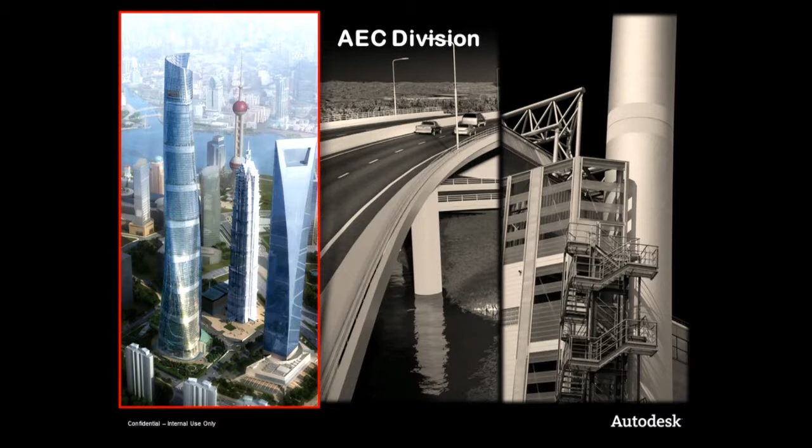It doesn't mean Revit is not used in other industries. Actually, a lot of people use Revit for plant and infrastructure projects, but I'm going to spend most of the time on the building side.

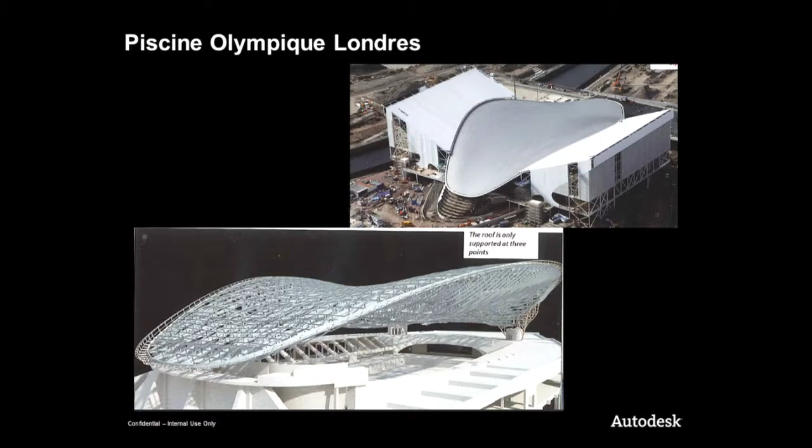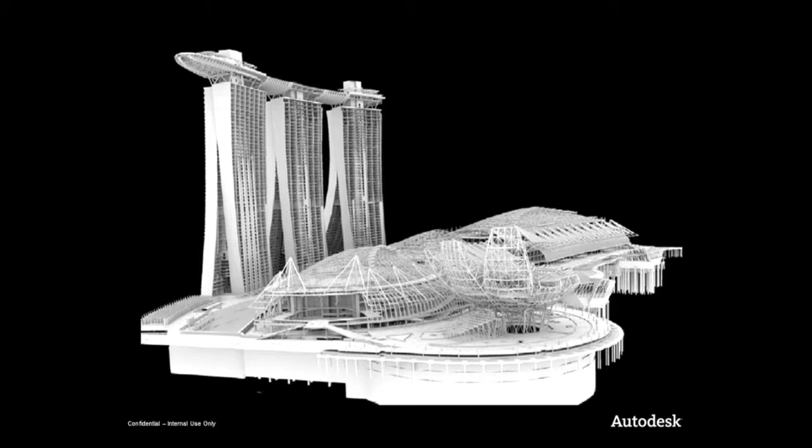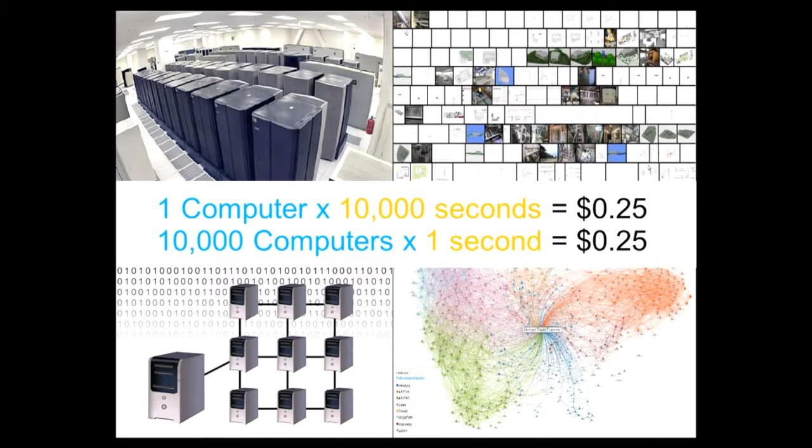So first of all, cloud computing, I'm sure you know what it means. And Autodesk is strategically moving into cloud computing through our partnership with Amazon.

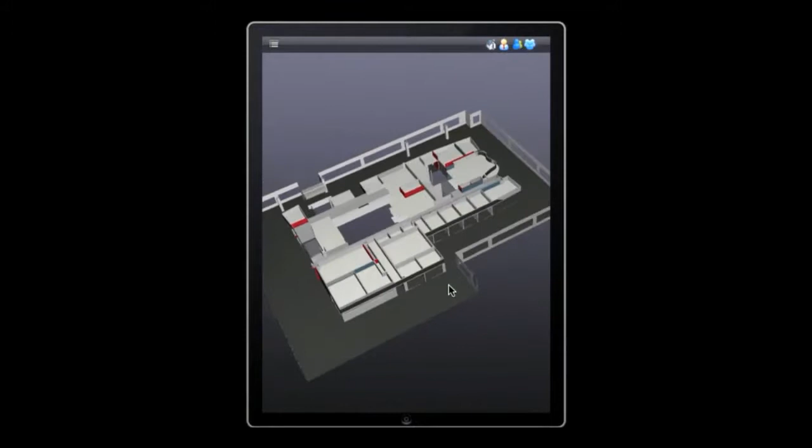And you could get the list of everything related to the second floor. So you could just select to view, a 2D view, a 3D view, anything that you found out of this request.

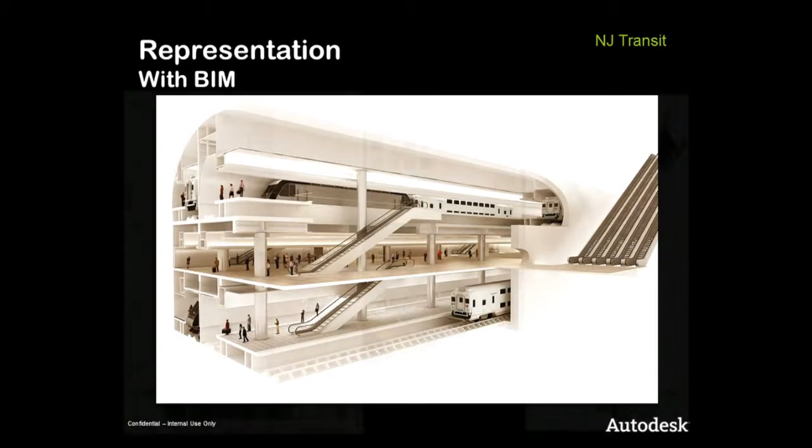They use building information modeling for 4D, 5D mainly. This type of rendering is also the norm, and this one is actually done with our rendering in the cloud.

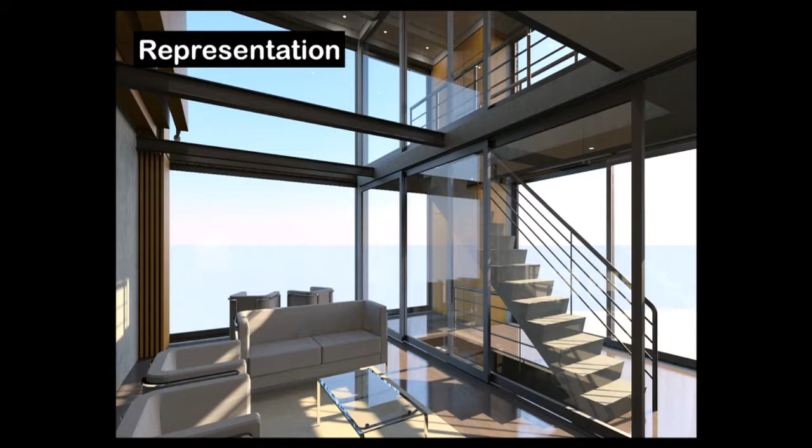So what we've seen in the world is there's a lot more renovation happening right now. If you don't consider China, India, and Brazil, most projects in the world right now, about 50 to 60%, are actually renovation projects, not new projects.

So there is a huge need to support capturing existing conditions. You've probably seen in Revit 2012 the support of point clouds.

So we see different workflows. One of them is really for designers. You take point clouds, and you remodel a project for a better design.

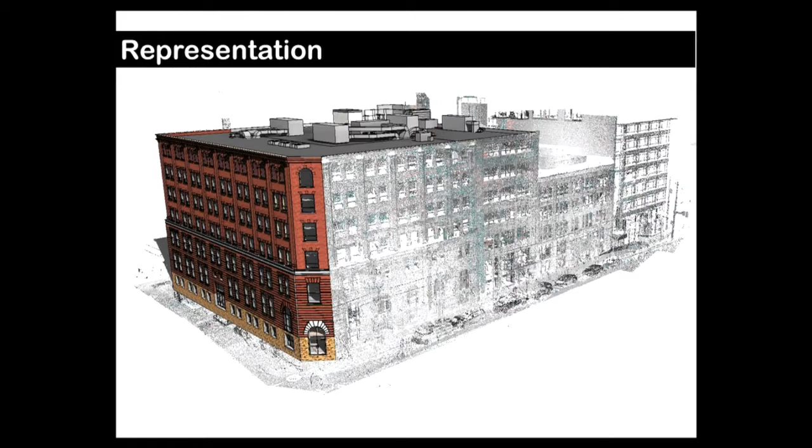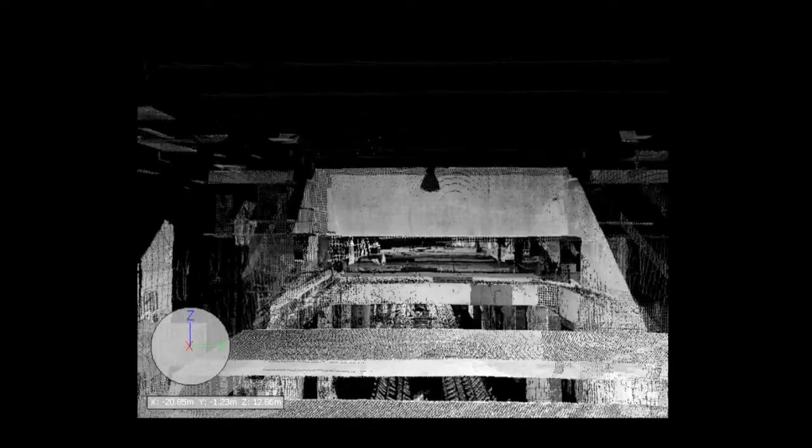They are using Revit to compare what they designed with what they built. I'm going to show you an example in just a couple of minutes. So last month, almost a month ago, we acquired a new company from the Netherlands.

They are developing high resolution rendering for point clouds. It's something that will integrate into Revit, probably not next year, but you should see it in the following years.

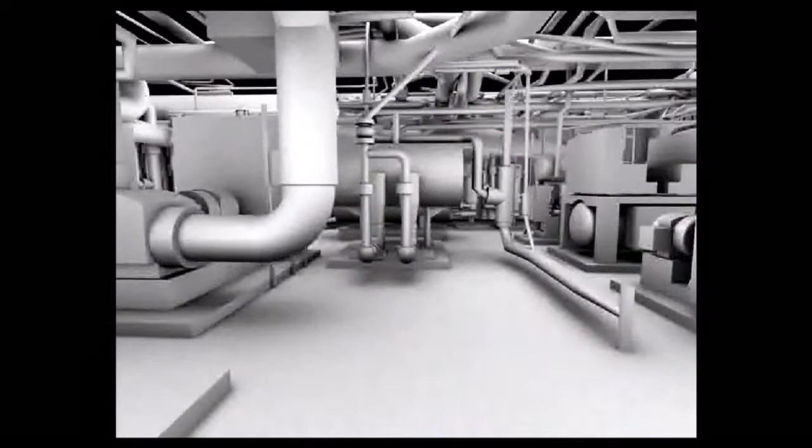Right now Revit supports several hundred million points, but we want to scale to several billion points. This is the work done by a partner. They have a technology that cleans point clouds and develops high-quality rendering.

It's pretty impressive the type of quality that you get out of this rendering. This is another example of 3D modeling with reality capture, and we are using photos.

You can see at the bottom all of the different photos that are taken, and you can just upload them to the cloud, and then we have a smart engine that will create these 3D models.

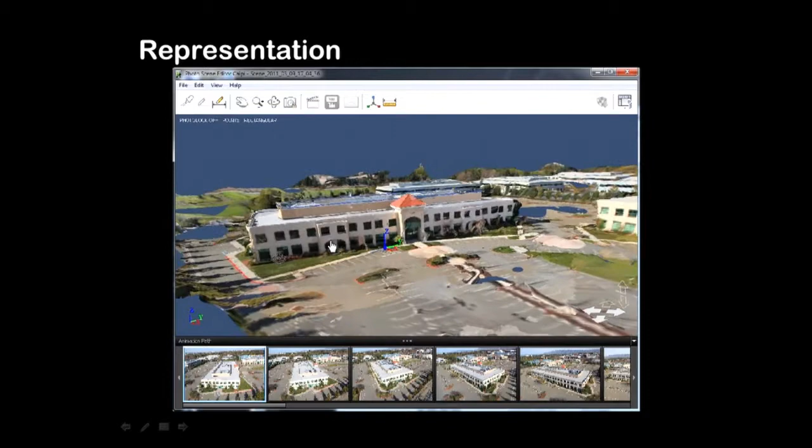It's another benefit of the cloud. But for this type of project, it's not to do design. It's what we've seen our customers do: it's for either communication, better understanding of the project, or to do energy analysis, because you can get some simple and rough geometries for energy analysis.

So what we are doing around simulation and analysis is integrating all of these capabilities inside Revit. First, we have an analysis visualization framework built inside Revit, so any third-party developer can represent any analysis information in a very simple way. It could be stress analysis, energy analysis, any kinds of data that you want to map to a structure.

An example can be fluid dynamics. This is available through Vasari. I don't know if you know Vasari - it's a Revit-based product that's available for free. It's only in English, and we use it for conceptual design. This is a great example of how analysis can be integrated in a Revit model.

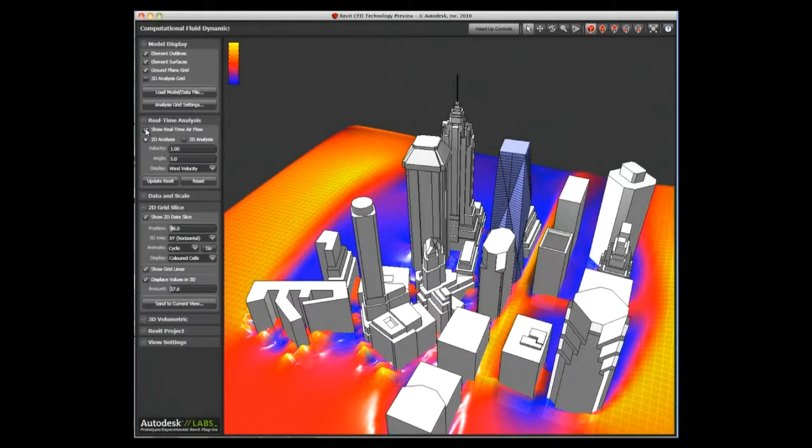Imagine that you have these tools available for you early in your design process, so you can make much better decisions based on this type of information. You better understand what you do based on analysis. Structural analysis is another example.

We just released a couple of months ago a new structural analysis tool in the cloud. So basically what you do is starting in Revit Structure, you can model everything for a project, all the loads, all the geometry, etc.

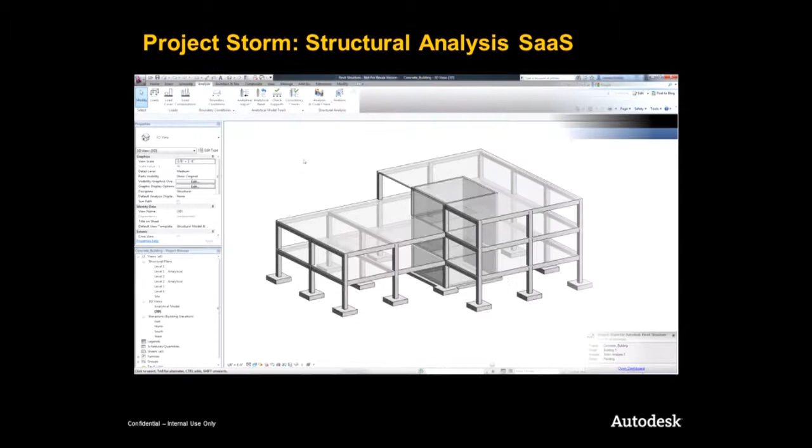There's a web portal where you can go at any time and see what's the status of the analysis, so you can keep working on your Revit project while the analysis are done.

And then when it's going to be done, you will be notified that it's ready for you.

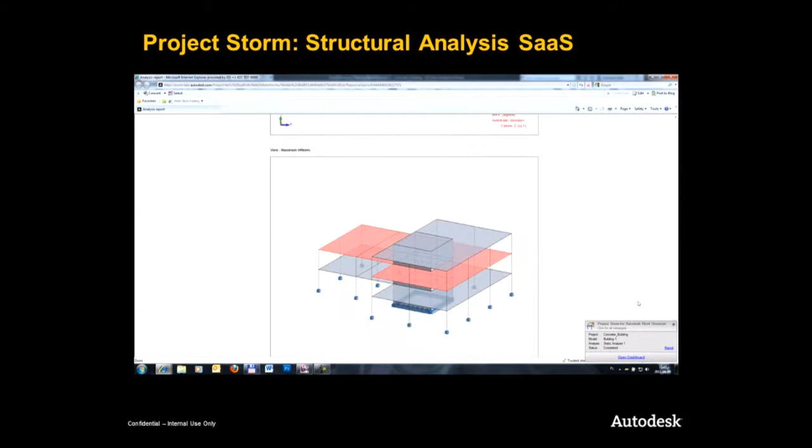Once the analysis is done, we create HTML reports that you can access through Internet Explorer or any web browser, and you can bring back all of the results inside Revit.

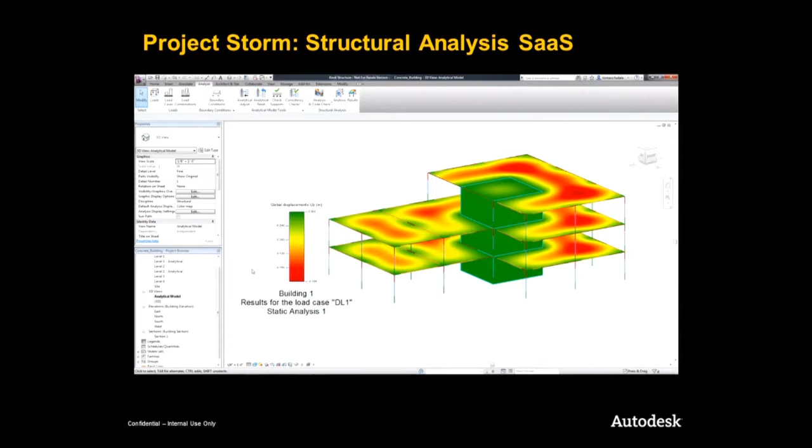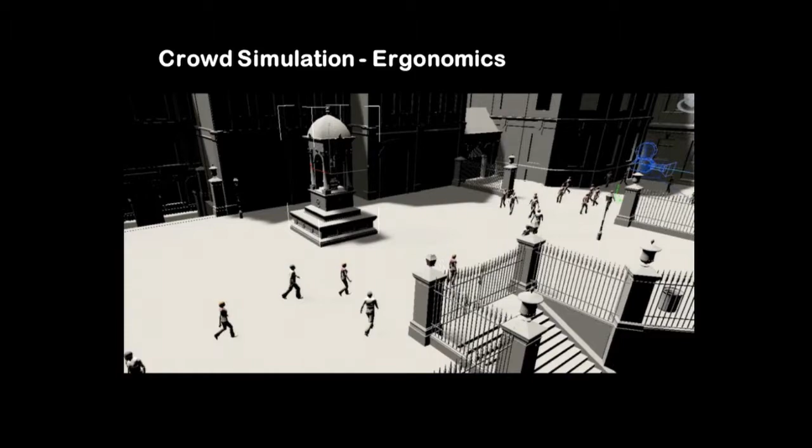This example is done by Parsons Brinckerhoff, and it shows the simulation of a crowd evacuating a stadium.

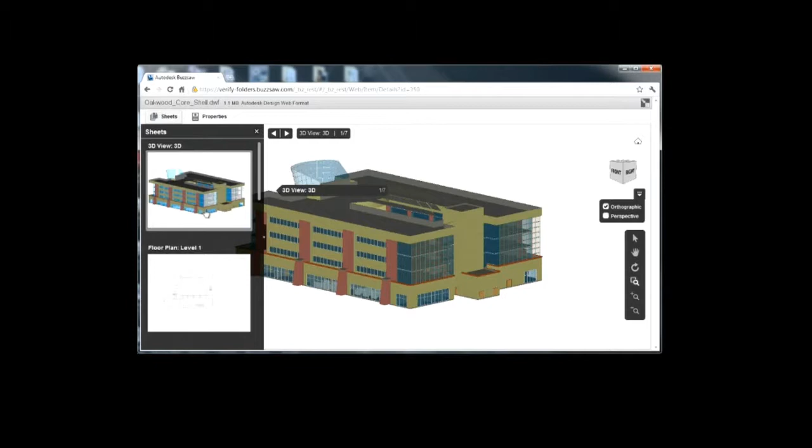I'm going to give you a preview of Buzzsaw, or the new Buzzsaw that will be released soon. What you see right now are some of the basic capabilities of Buzzsaw with a 3D viewer. But the interesting thing we just developed is Buzzsaw being able to represent Revit files.

Talking about construction and what's really important, what we hear from our customers, is to be able to take the data to the field. It's not about the data directly in your office, but taking your data to the field.

So what this video shows is a research project, not commercialized.

It's somebody walking in a building, and the dot you see is actually where you are. So we can walk around and understand exactly where we are and calibrate it with a drawing or a 3D view.

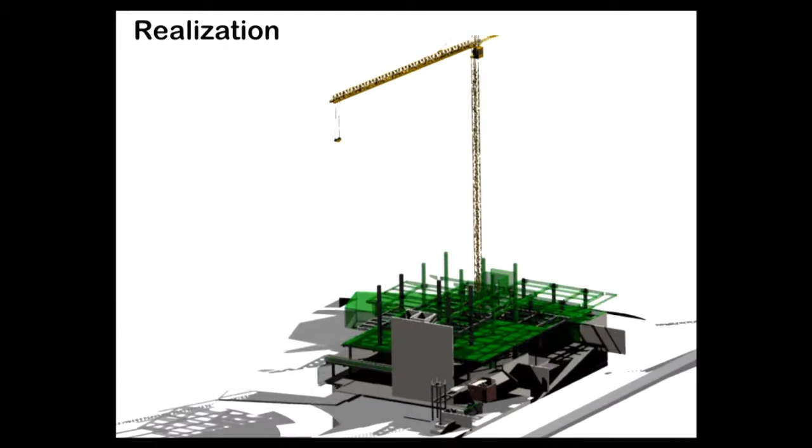What's important for our construction customers is to move from a design intent model to a construction modeling with a lot more levels of detail. And once it's done, we can do a lot of these 4D representations that otherwise would not be possible.

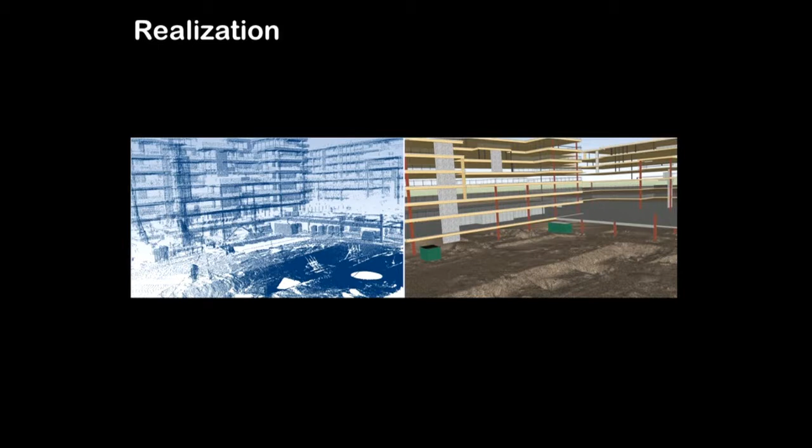So for that, they are using point cloud technology. What you see on the screen is a Revit slab, a regular slab created in Revit. All of the colors that you see are actually point clouds that were scanned in the field. We put together the point clouds and the real slab, and we can see the differences between what's being designed and what's being built.

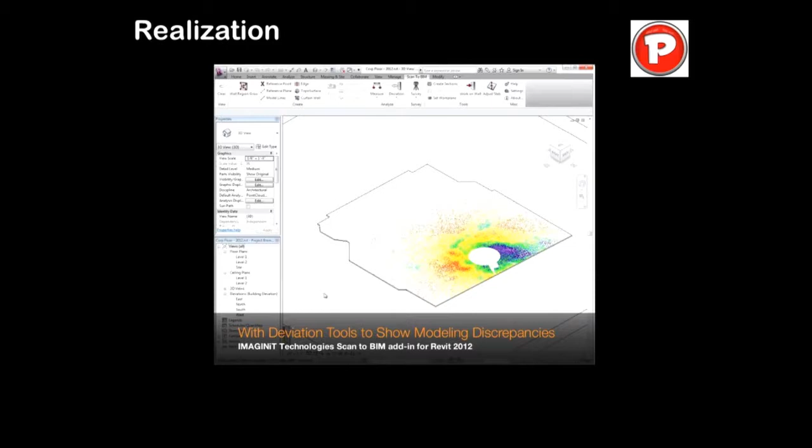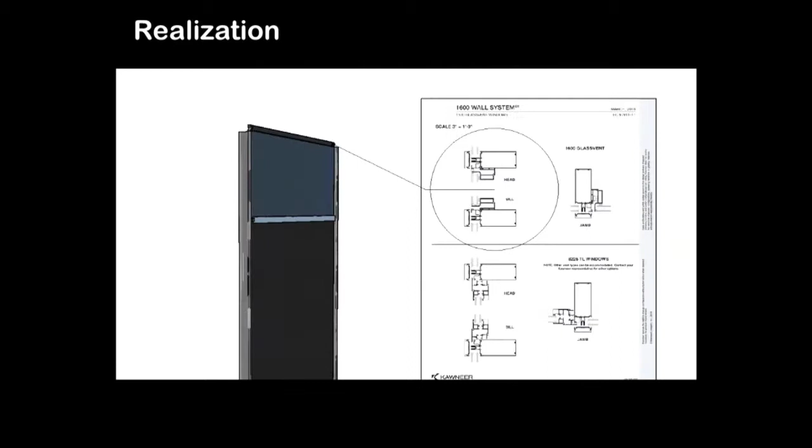So it's really IKEA for the construction industry. Today this is available, and it's even available on an iPad. So you can create this type of document, give it to the field, and when they need to install something, they can use this type of instructions.

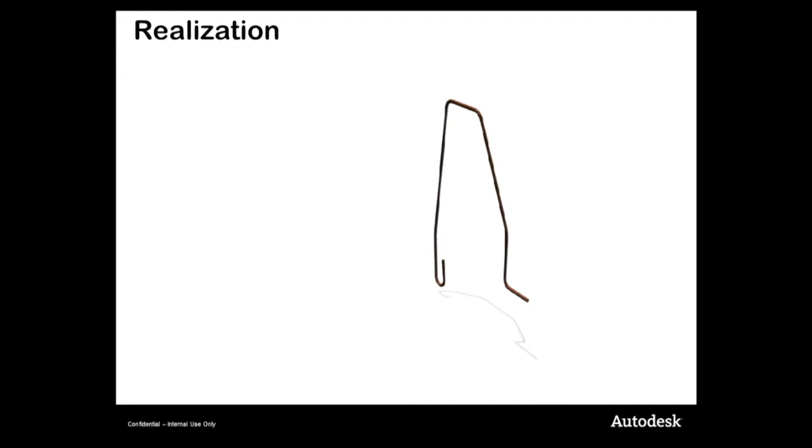This is another example of what we saw. It's actually a customer video, and instead of doing drawings, that's what they do out of Revit. So they create these instructions for precast concrete.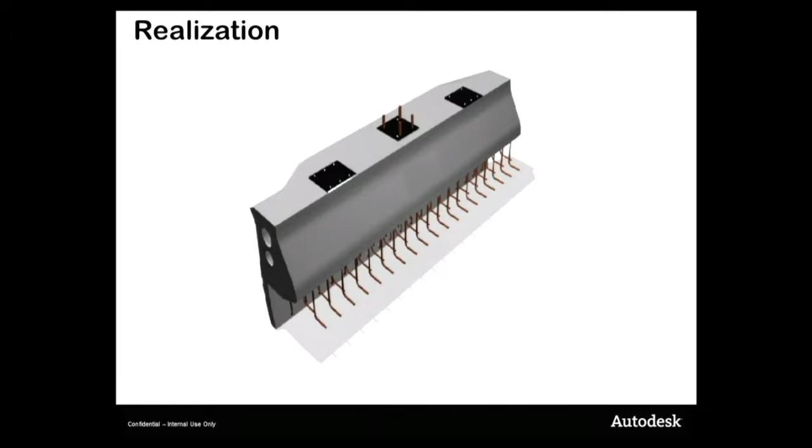Given the waste in the industry, which is about 30 to 40%, there's a huge opportunity to automate some of these processes with fabrication and prefabrication.

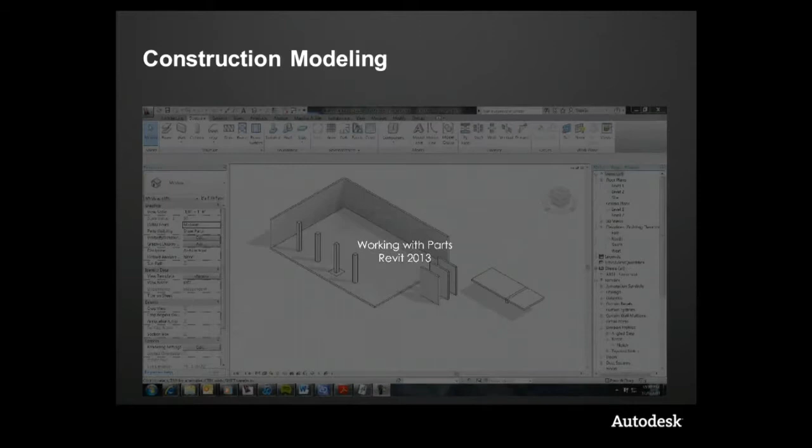They want to do what we call as-built modeling, to get much more accurate quantities, much more accurate clash detection. So we've been working in Revit, we started in 2012, and you will see a lot more in terms of improving the capabilities around construction modeling.

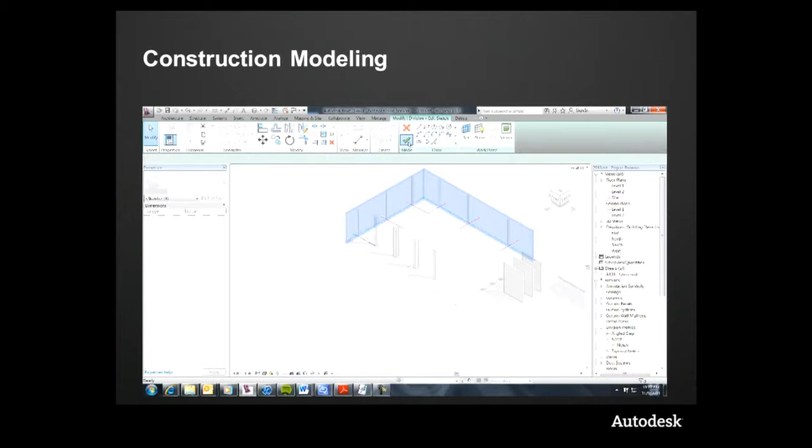So what we do in the 2013, we go much deeper in terms of defining the gaps between the elements. What you see is actually some of the functionality of the 2013. So we added a lot of information about the gaps between the elements. We also did some work to join elements, because sometimes you don't want to divide, but you want to add elements together for the construction purpose.

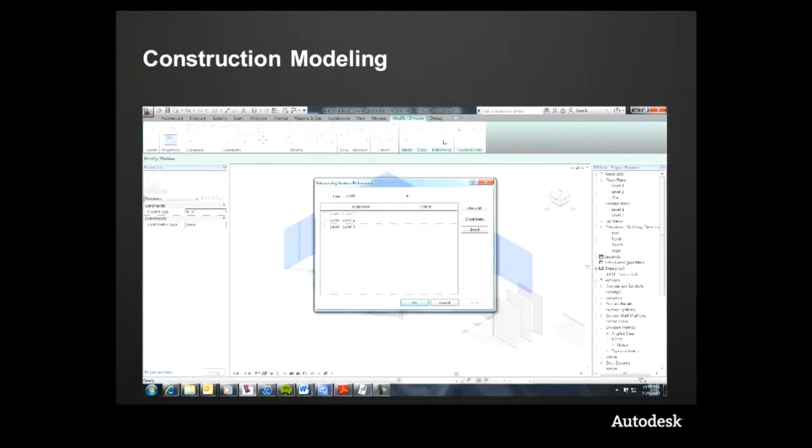We also added these capabilities to beams and columns, so you can also split them to show where you're going to pour the concrete. Yeah, and we'll be able to split based on grid lines, based on a lot of different rules. So a lot of work has been done around very precise modeling of walls, columns, beams, etc.

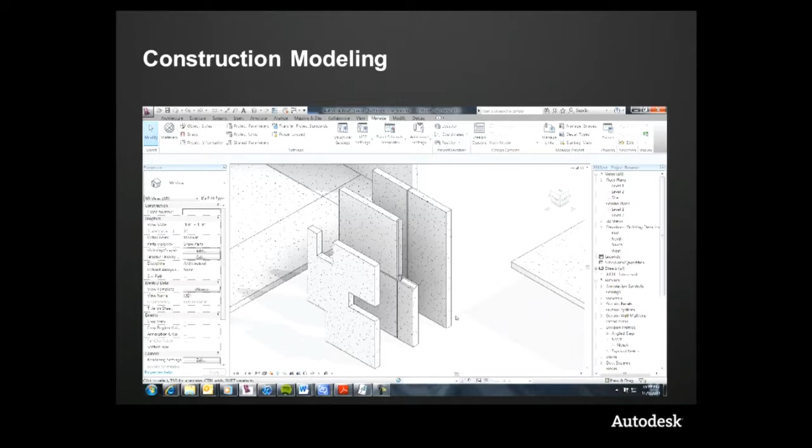So once you do that, you can do all your 4D actually very precisely. So for beams, and I think that's what we're going to see, is you can also have different pouring limits between the bottom of the beam and the top of the beam, especially when you do precast beams.

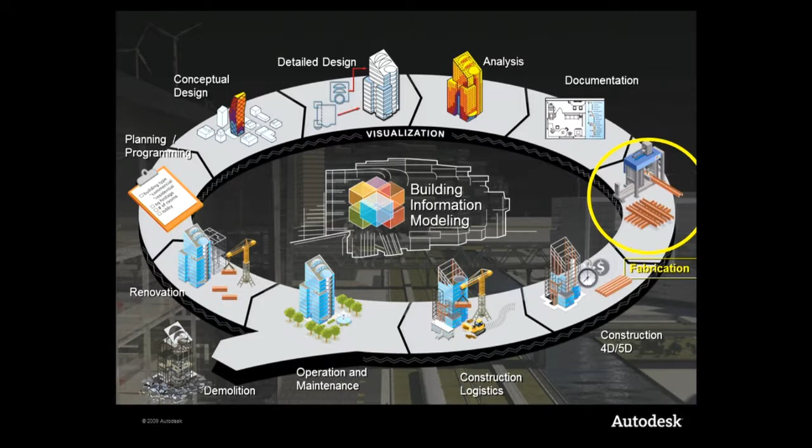So we expand the concept that we had in the 2012 to go much deeper, to be very granular in what we define in Revit. So the other thing that we are working on is around the fabrication piece, and to be able to drive fabrication out of a Revit model.

And so that's why we really need to get to an as-built level of details. And the top images actually represent where we are today. We are really in the model-based design, and what we are doing is to move into the as-built.

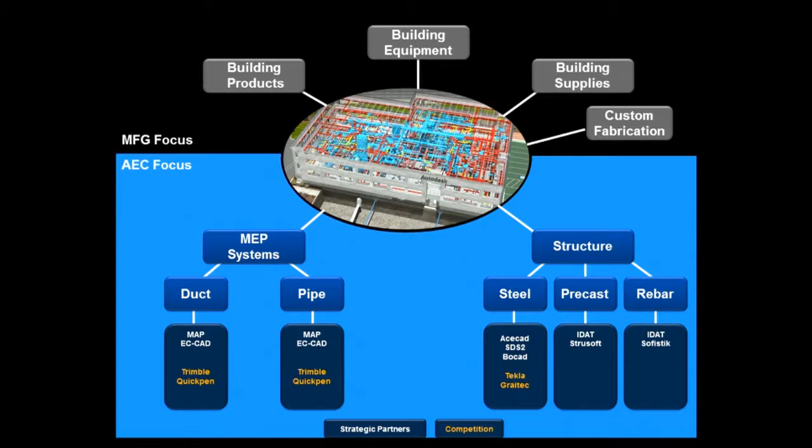So we just announced about 3 weeks ago the acquisition of this company, and it's a pretty big step for building information modeling, and it's a very strong statement from Autodesk around fabrication.

So this company develops technology that drives the fabrication of MEP systems. So we'll be working to integrate this into Revit, and I'm going to show you how.

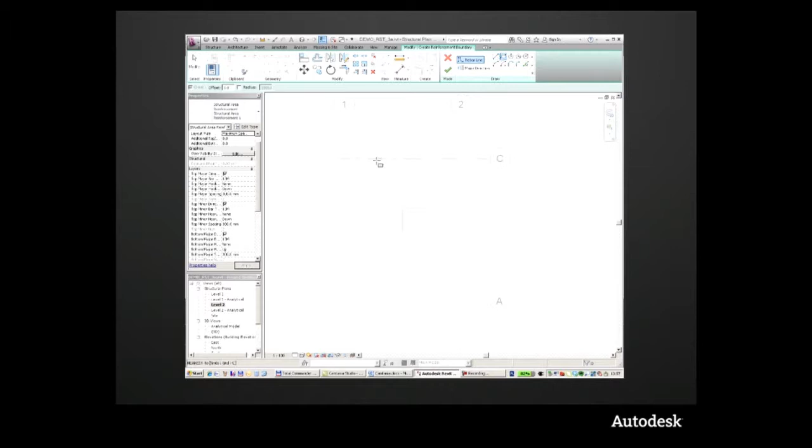So when we think as-built modeling, 3D reinforcement is something that comes up quite a bit. And in this example, actually, we see how we can model, very easily, very precisely the reinforcement on areas. In the past, we could not do this type of things.

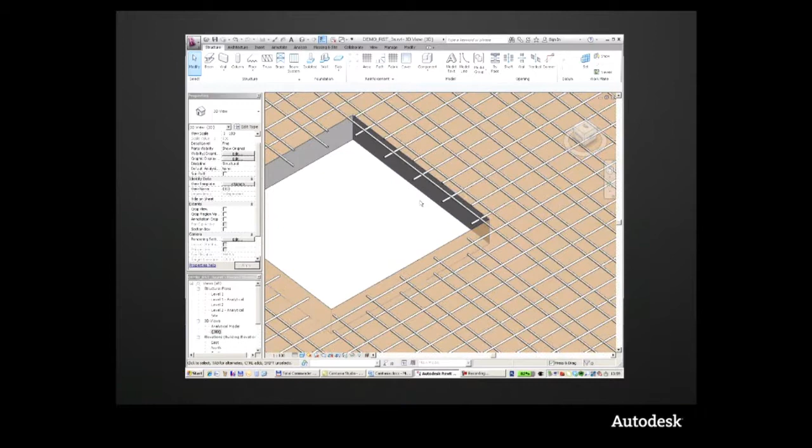We had a symbolic representation of reinforcement, but you will see in the near future a lot more capabilities in terms of 3D reinforcement modeling, where you get access to every single bar. This example is a slab, for instance. So 3D rebar.

And I'll show you also a video of how one of our partners takes this information and fabricates the rebar out of it.

This one is another example, and in this case, it's the usage of meshes. So instead of single bars, it's also the implementation of different mesh with the smart rules directly inside the slabs.

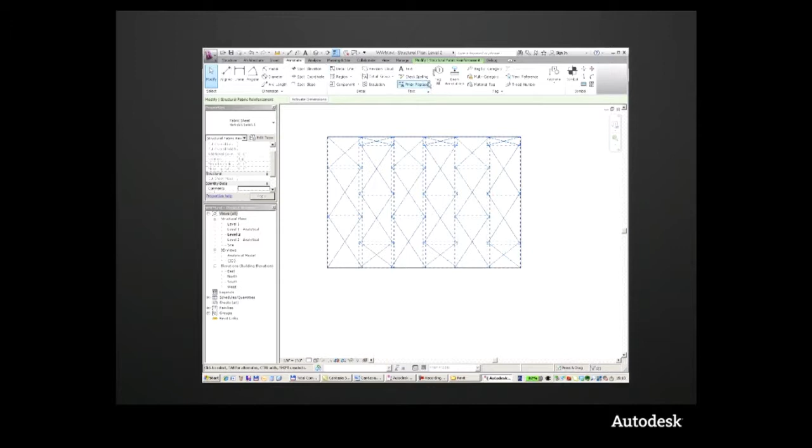So these are also examples in terms of how we increase the level of details inside Revit.

So when we think about the workflow from design to fabrication and installation, there are a number of steps. So in Revit, we do what we call the design intent.

And then detailers and fabricators create the shop drawings and then drive the CAM tools for fabrication.

So right now you can see the scope of what Autodesk does and what our partners do. And MAP is the company we acquired around MEP.

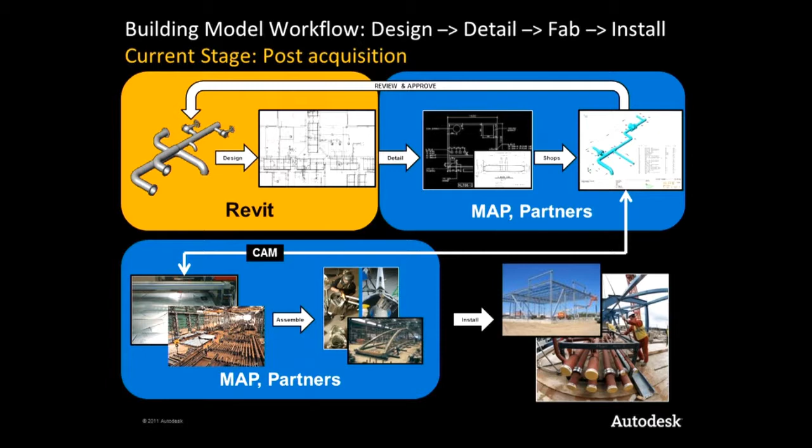And our goal is actually to provide shop drawings and as-built modeling for these components directly inside Revit. And we'll keep the manufacturing outside. The manufacturing is how you fabricate things.

I'm going to show you a video from one of our partners for precast concrete. And it actually tells a very good story in terms of what you can do in Revit. So for this example, what this tool does, it has a lot of details inside Revit.

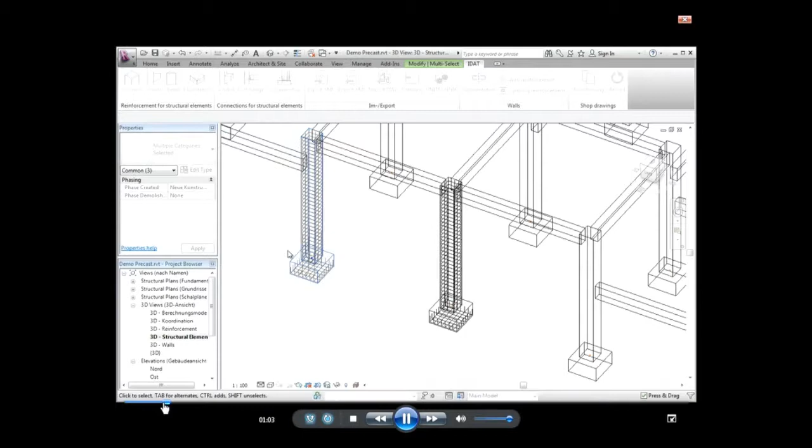So a lot of reinforcement, but also all the bolts, all the mounting parts, all the cuts that we need in the concrete. And then all of the core bolts to support the precast elements. So it's done for the entire project.

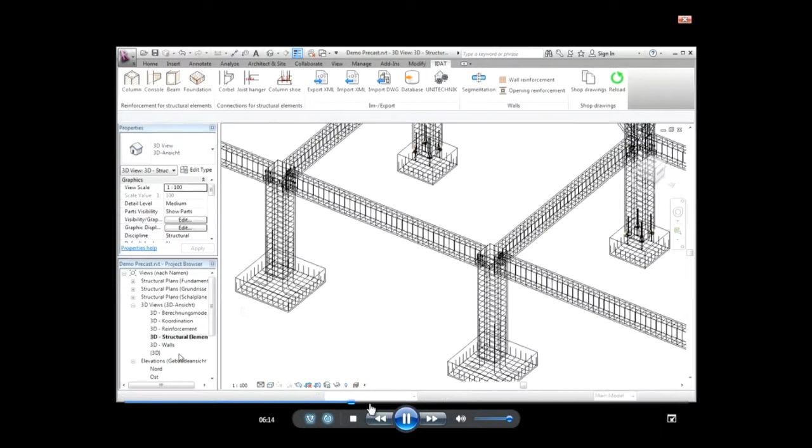And then what this tool does, it takes the concrete elements such as walls, for instance. And then it's going to slice them and create precast panels. So you can see that all the walls have been cut. So this tool creates actually all the shop drawings inside Revit. But what's very interesting is what you do with the data.

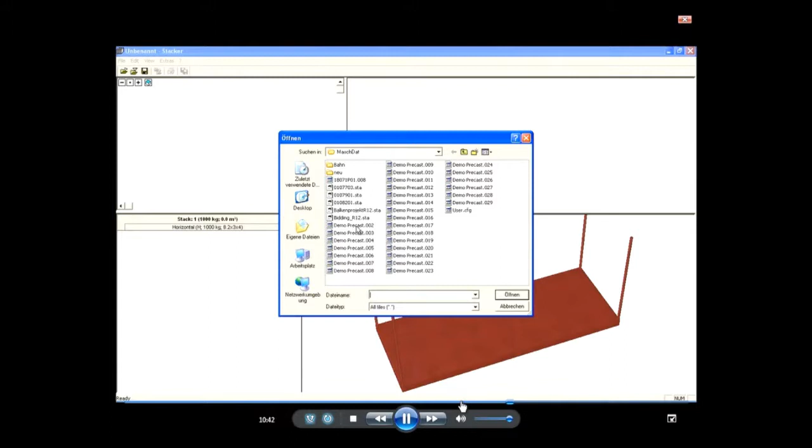So once it's done in Revit, this tool actually exports the data to some CAM software. So what you see on the screen is actually the plan view of this small project. The video is not high quality. And what you see on the bottom right is actually the truck that will carry the precast panels. So this tool optimizes the way the truck is going to carry the precast panels.

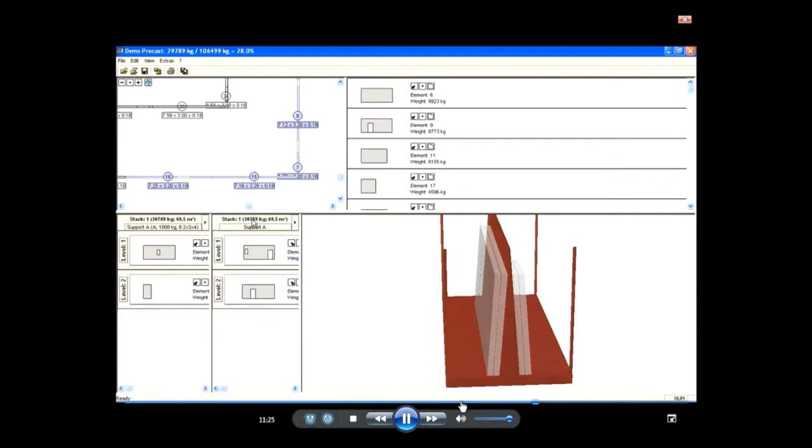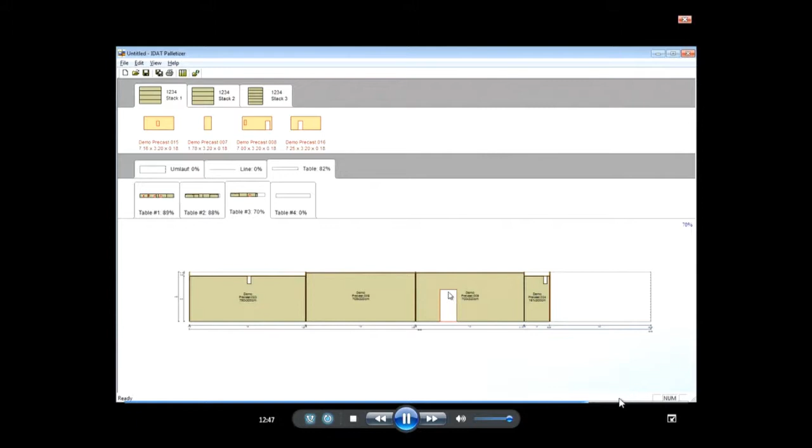And all of this information comes from Revit natively. The other thing that this tool does, it's going to optimize also the factory. So in terms of which panel will be fabricated first, you can just drag and drop these wall panels, and it's going to drive the machines in terms of the sequence to build them. So what you see on this picture is the robots that put the formwork in the factory.

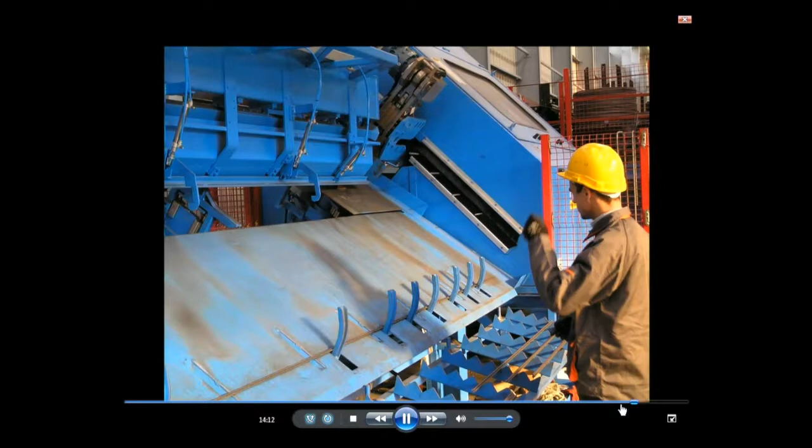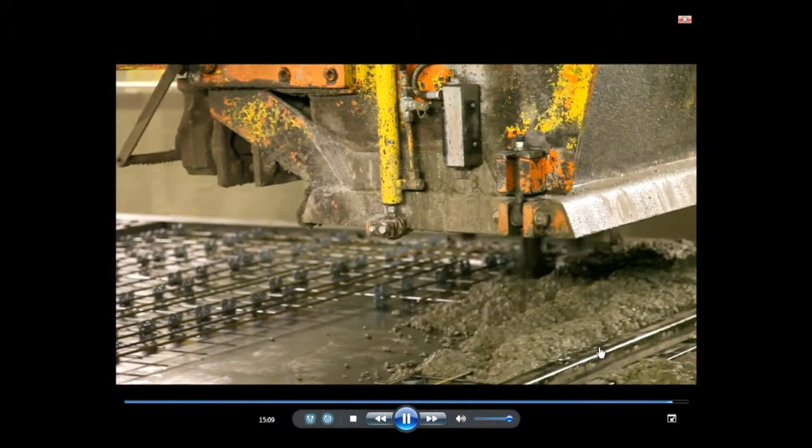And all this information comes from Revit. And then the reinforcement will be created by other machines that weld all the rebar. And then the robot takes what they fabricated and puts them on the formwork. And then the concrete will be poured.

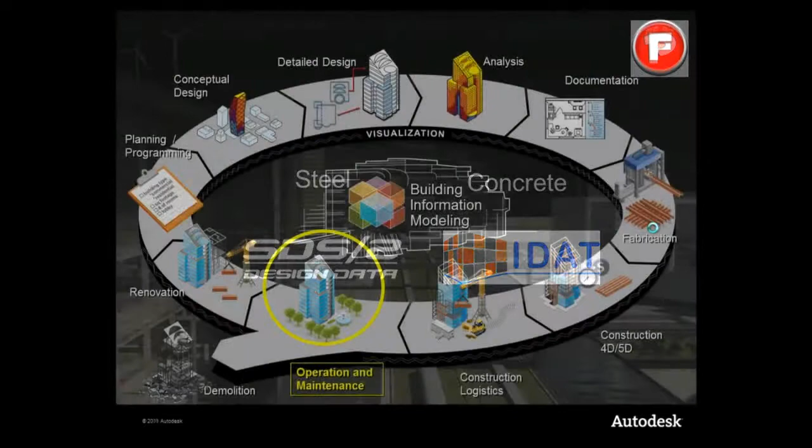So all this is actually German technology, but it's really fascinating to see how the next steps of building information modeling will allow this industry to automate and streamline the process from the design model to the fabrication. I'm going to finish with the operation and maintenance of projects. And the cost of operation and maintenance over a period of 20 years is actually 80% on the operation and maintenance and 20% design and construction for complex projects like hospitals, pharmaceuticals, etc.

So what we are doing right now, we are around operation and maintenance. So first, we are educating owners about what the benefits of building information modeling are. Because they understand the value of better design, better delivered projects, but they don't know what they can do with the data, with the information inside building information modeling.

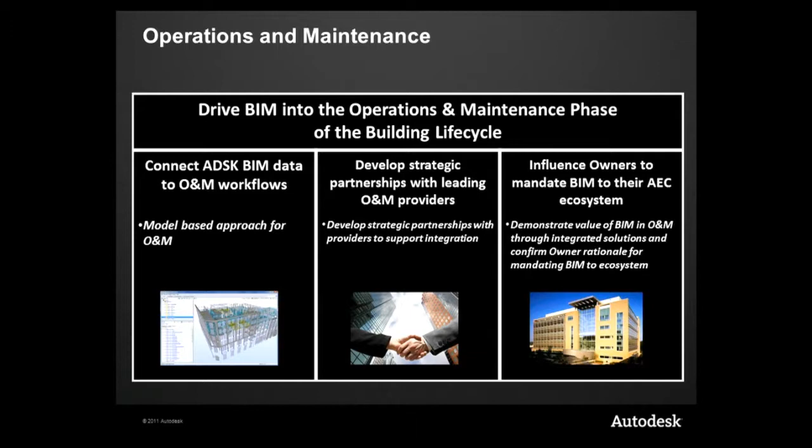And we are developing partnerships with a number of industry players, and I'm going to explain what it is. But the concept is to connect Revit data to different software used in the operation and maintenance phase. So it's really a research phase right now, and we understand that in the middle we need to have this owner model, and we don't know if it's a design model, a construction model, we don't know if it's an as-built or if there is a concept of as-maintained, because owners don't need all of the details in the model, but they need other things.

So what we've done is we've integrated Revit with 3 different tools. So we are looking at the facility management, and it's really space planning. And we work with a company called FM:Systems. And then I'm going to show you the work we do with IBM Maximo for maintenance management, and then the work that we do with Johnson Controls for energy management and energy monitoring of buildings.

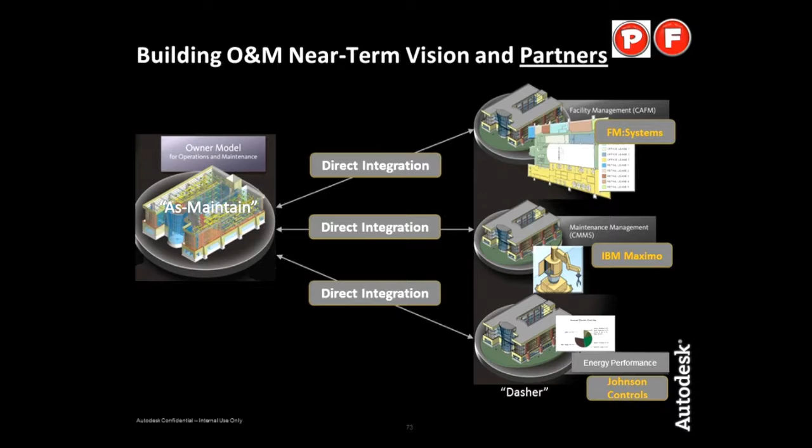So what owners are very interested to understand to optimize their buildings, it's the way they behave. So they want to understand where the energy is used. Is it at the building level, at the floor level? Maybe a specific area, maybe just a cubicle, maybe just one outlet.

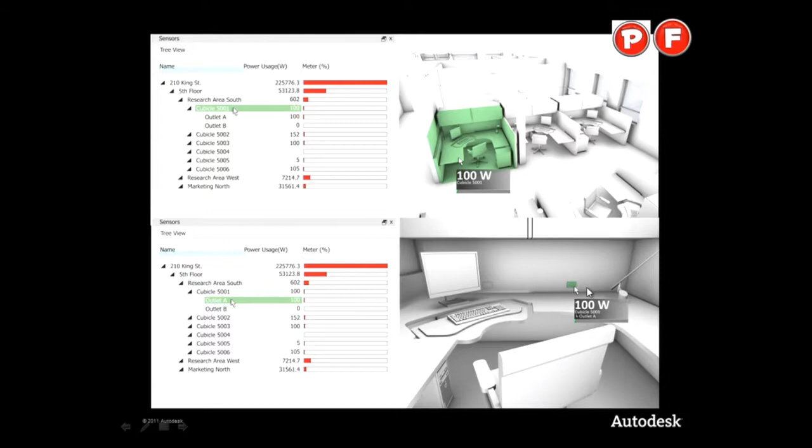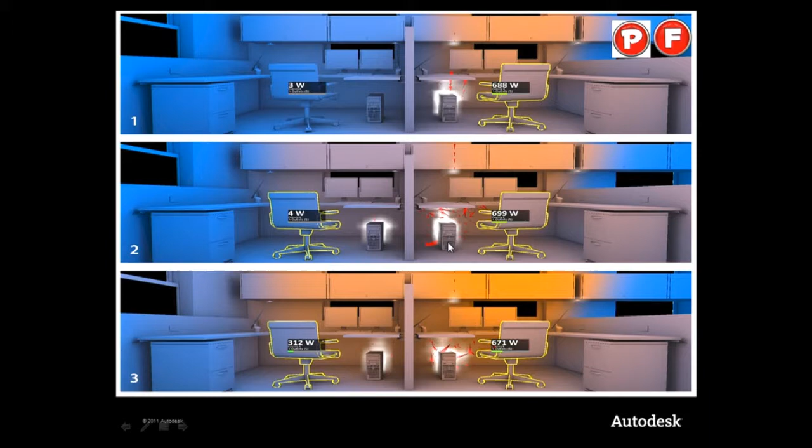We put sensors, so we can understand the consumption of energy if you keep your computer on or off. So for owners, it's really interesting to understand the consequences if somebody keeps the light or the computer on. So we developed a very simple user interface.

It's a web interface, and the data come from Revit. And what you see, I don't know if you see all of the green dots. They are sensors that Johnson Controls put in the building.

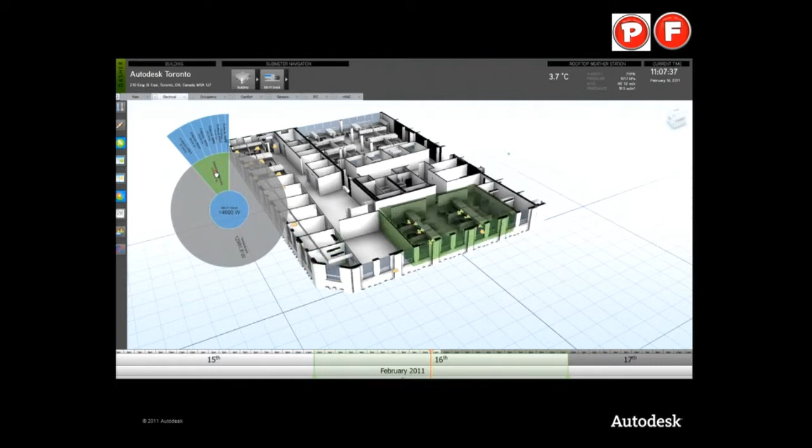So we can isolate just parts of the building, maybe just an area or maybe just a room, and we can monitor everything that's going on. So what you see on the screen is actually the consumption of energy of a specific outlet, for instance. And you can go at any time and understand what happened in the building.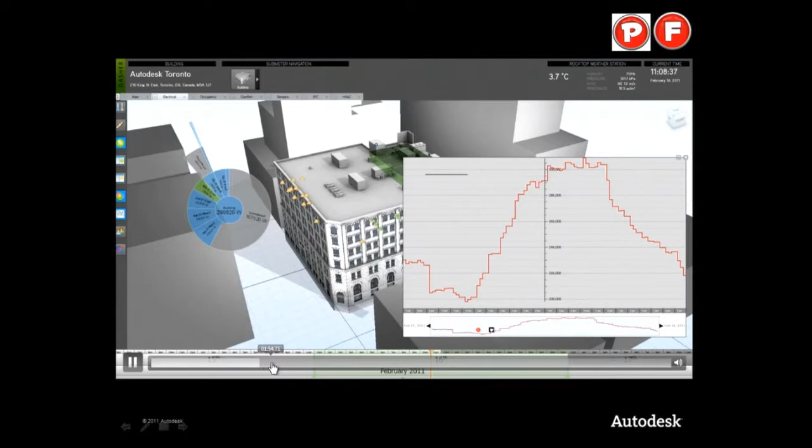So this scares people. So I want to warn you. So what we've done too, we also placed sensors on chairs, and the red cylinders are people. So we can actually see when people are at their desks.

It doesn't mean it's going to be implemented, but it's fascinating what you can do with technology. So actually, it could be used to understand space planning and if we need all of the offices or not.

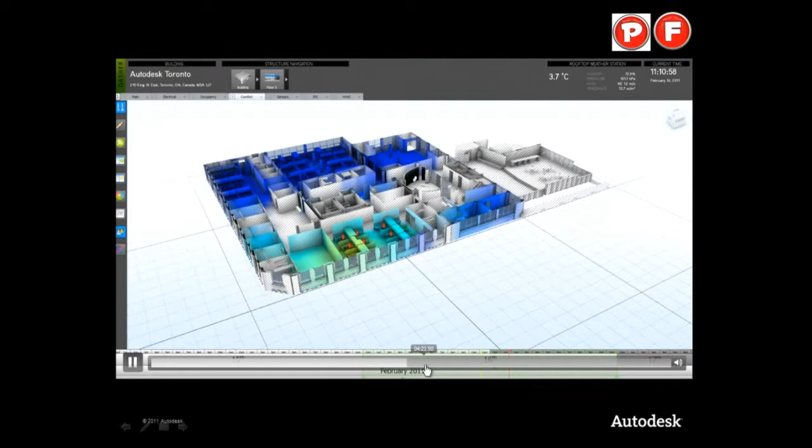So I'm going to show you one last thing, which is the work that we are doing with Maximo. And Maximo is a maintenance software that maintains all of the assets of a project. The reason why we implemented this is really to educate owners about the value of building information modeling.

And it's not productized yet, it's just a prototype, and I think it's going to be seen at the IBM booth here. So I'm going to replay it. So what we've done, it's a very simple project. And actually it has 51 rooms. So very simple project.

To do the export from Revit to Maximo, it's about 1 or 2 minutes to do the export. Not a lot of time. And then we import all of this information in Maximo, and this is the user interface of Maximo if you don't know it. There's no graphics, nothing visual. So to put the information that we exported from Revit, it's about 2 weeks of work.

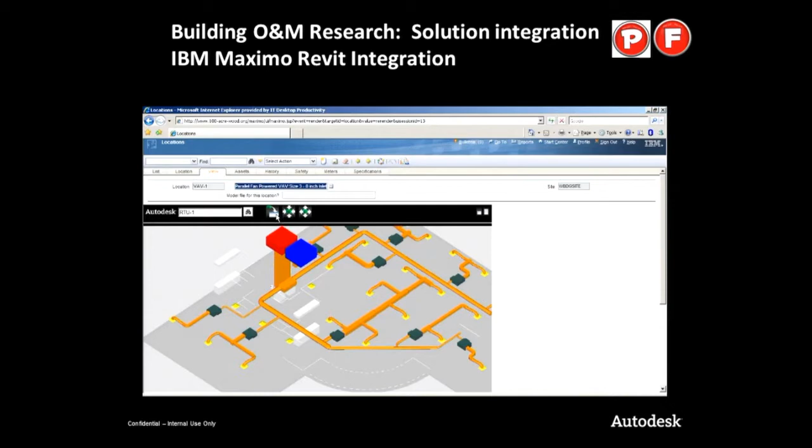And of course, this information can go back to Revit. So what's interesting, I don't know if it's happening in Japan, but in the rest of the world, we see that the role of architecture is changing, and the balance between architects and construction companies is changing, and architects are looking at providing new services to their clients, providing models to owners and building these workflows around operation and maintenance.